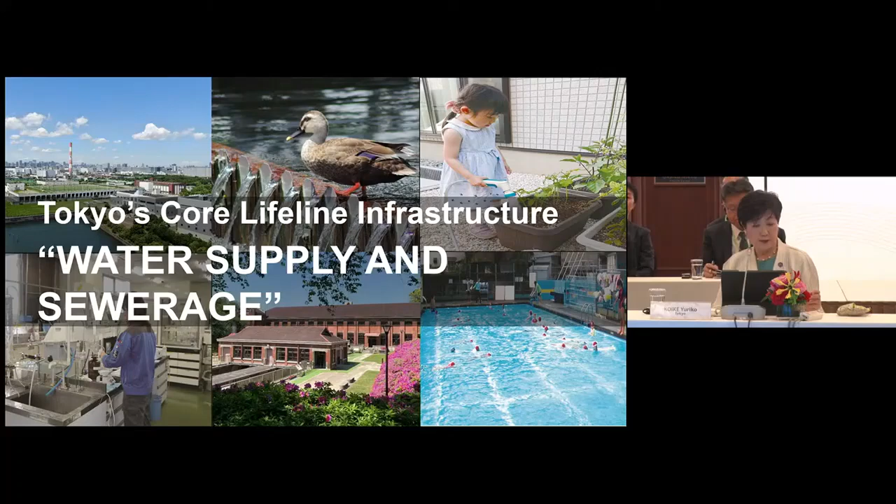Thank you very much. As you know, the theme of today's Tokyo-SEADS meeting is storm and flood countermeasures and development of urban infrastructure. I have already introduced some of Tokyo's storm and flood countermeasures during a G-NETS session, so today I will speak on measures related to urban infrastructure, with a particular focus on the core lifeline services of water supply and sewerage.

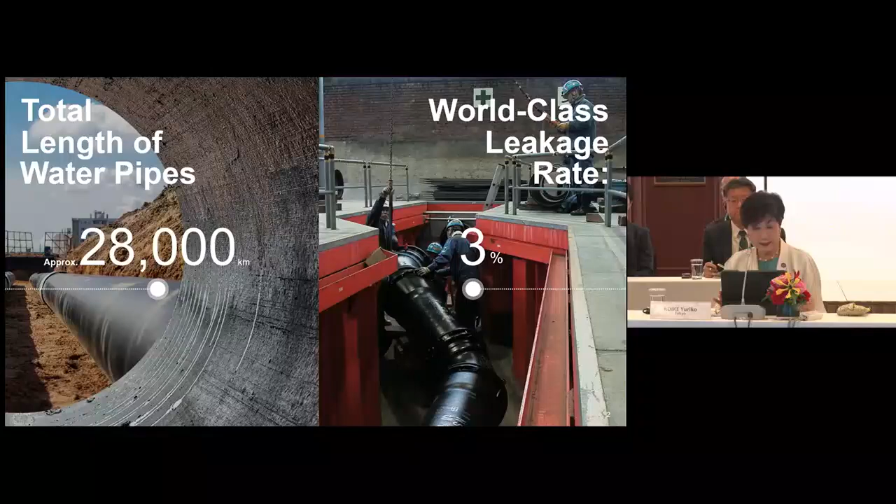Tokyo's waterworks business first began supplying water in 1898, and ever since then it has served as one of the most essential parts of Tokyo's urban infrastructure, supporting residents' lives and our city's urban activities. Our water supply system is one of the largest in the world. You can imagine, we have a 14 million population. It consists of approximately 28,000 kilometers of piping that delivers water from supply stations to households and businesses—enough to stretch two-thirds of the way around the earth.

So big. To ensure a stable supply of high quality water, measures to prevent leakage are of the utmost importance. Through comprehensive measures centering on systematically replacing water pipes and upgrading piping material, the Tokyo Metropolitan Government has achieved a leakage rate of only 3%, which is among the best in the world. Preventing water leakage not only reduces secondary damage, such as road cave-ins and flooding in buildings, but also reduces non-revenue water that goes unbilled, which contributes directly to stability in water utility operations.

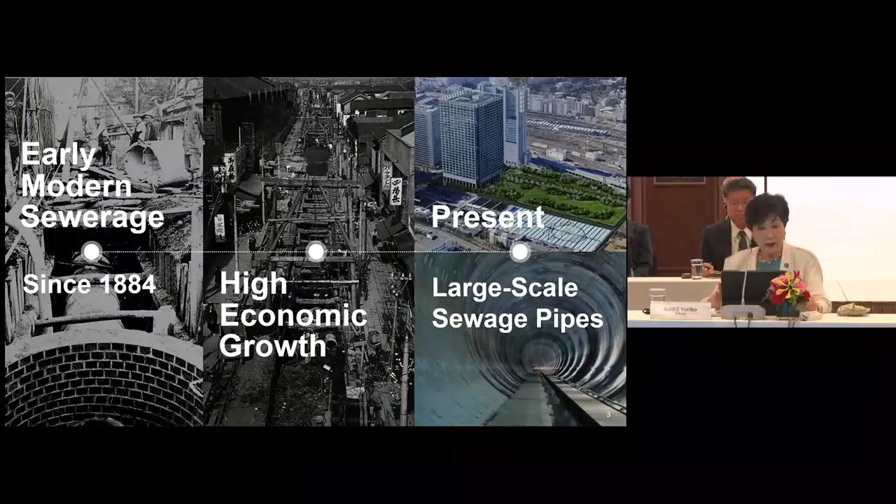We have also advanced measures to utilize spaces above sewage treatment plants as parks and office buildings. Tokyo has approximately 16,000 kilometers of sewer pipes, many of which were installed decades ago. Unless these aging pipes are systematically upgraded, the risk of road cave-ins will increase.

As such, the Tokyo Metropolitan Government has developed the so-called SPR method, a trenchless lining system for sewer pipe rehabilitation in live flow. And although this method slightly reduces the inner area of pipes, it enhances the flow of water by creating a smooth surface.

This method also allows for reduced construction times and lower costs, while minimizing impact on road traffic. In areas where this method has been used, the number of road cave-ins has decreased by approximately 90%.

There is also high global demand for the SPR method, and it has already been introduced in 200 kilometers of sewer pipes overseas, mainly in Asia, North America, and Europe.

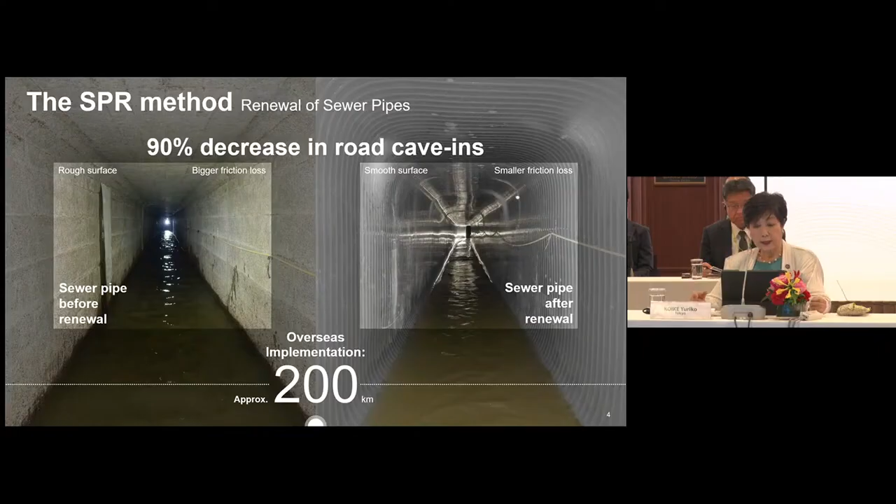Furthermore, at the request of overseas cities, the Tokyo Metropolitan Government conducts various training sessions and tours of facilities related to water supply and sewerage.

Last year, we welcomed more than 300 participants. Water supply training topics include leakage prevention measures and water quality management, and sewerage training includes a simulation of the difficulties and dangers of walking in flowing water at a facility that replicates the conditions inside an operational sewer pipe.

Water supply and sewerage systems form the essential foundation of our residents' daily lives. I think this is a really common agenda, and these are very essential infrastructure, also indispensable for enhancing resilience against natural disasters and boosting urban competitiveness.

So let's work together to build a resilient future by sharing knowledge and promoting practical and technical cooperation through the TOKYO-SEADS network. Thank you very much.

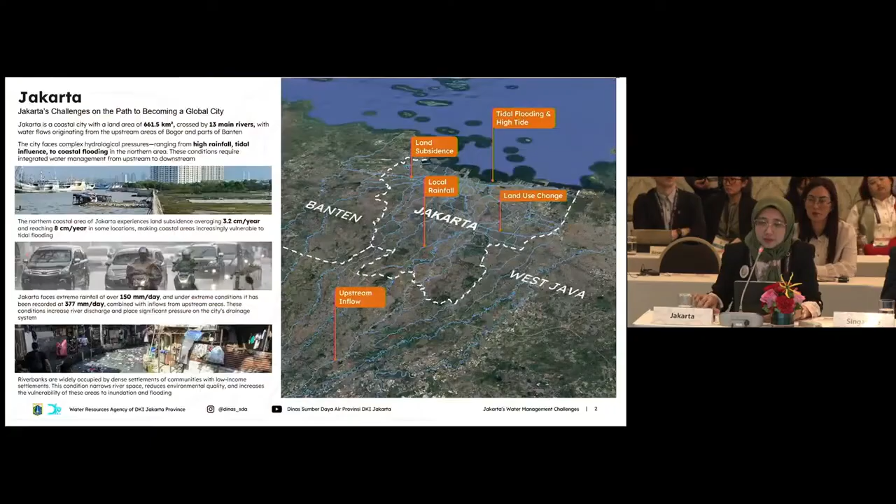Distinguished guests, ladies and gentlemen, if we are talking about Jakarta, Jakarta itself is a coastal metropolis with a land area of approximately 661.5 square kilometers, crossed by 13 major rivers. The city water system is shaped not only by local rainfall but also by upstream flow, because Jakarta is in the downstream area, surrounded by other cities, so the water flows to the city through 13 rivers.

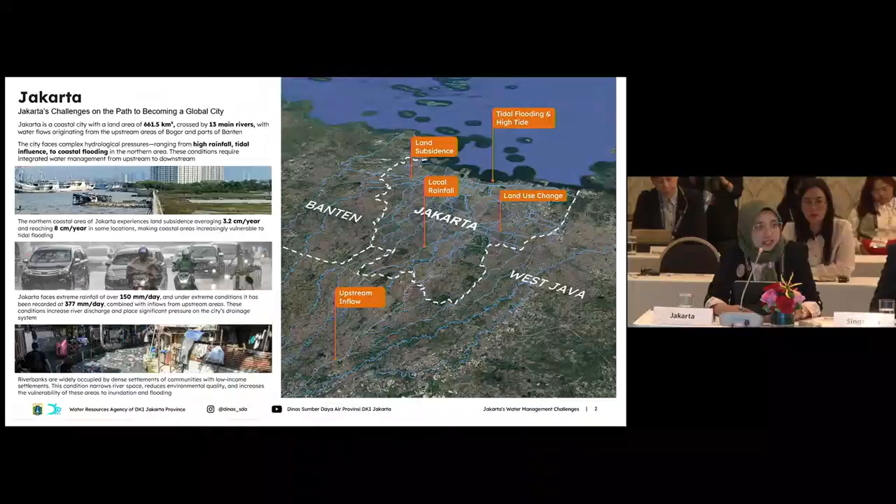As one of the world's major urban centers, Jakarta is confronted by multiple hydrological pressures at the same time. Daily rainfall can exceed 150 millimeters, and the highest recorded rainfall reached 377 millimeters in 2020. Last year, our rainfall was about 200 to 250 millimeters in just 4 hours. At the same time, Jakarta faces tidal influence and coastal flooding. Land subsidence is around 3 to 8 centimeters per year.

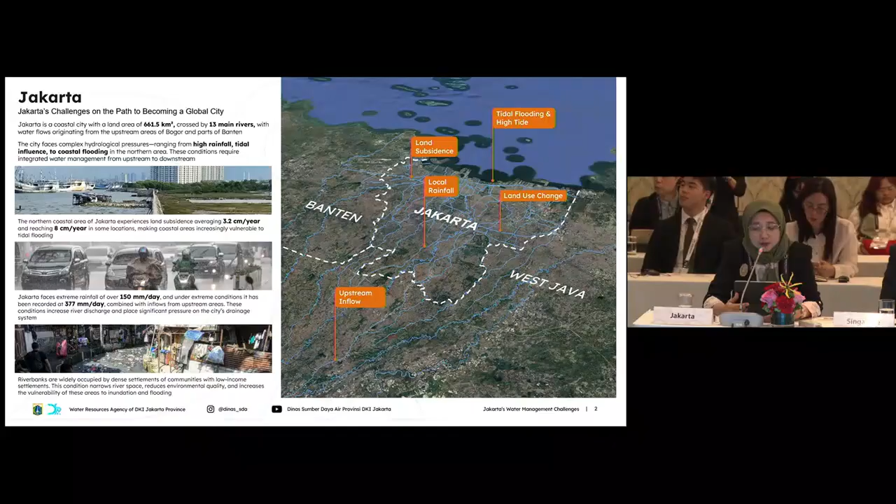We are not only facing floods but also tidal and sea-level issues that need improvement. Water challenges are not only about infrastructure, but also about environmental quality, spatial improvement, and public welfare.

In response, the provincial government of DKI Jakarta continues to strengthen an integrated approach to water management. In low-lying areas, we built polder systems. We have around 600 pumping stations in 200 locations, with a total capacity of around 700 cubic meters per second.

We have developed temporary retention pumping stations into the river and the sea. We also built improvements along rivers and canals. Improvement works are being carried out to increase conveyance capacity and reduce flood water. Right now, Jakarta is trying to improve infrastructure through nature-based solutions, combining gray infrastructure with green infrastructure, to manage runoff during heavy rainfall.

At the same time, Jakarta has learned that urban water challenges cannot be addressed through gray infrastructure alone. For this reason, the city has begun to introduce nature-based solutions, and we are also building a dike in North Jakarta through the National Capital Integrated Coastal Development. These efforts are further supported by digitalization, enabling better monitoring, more responsive infrastructure management, and more informed decision-making.

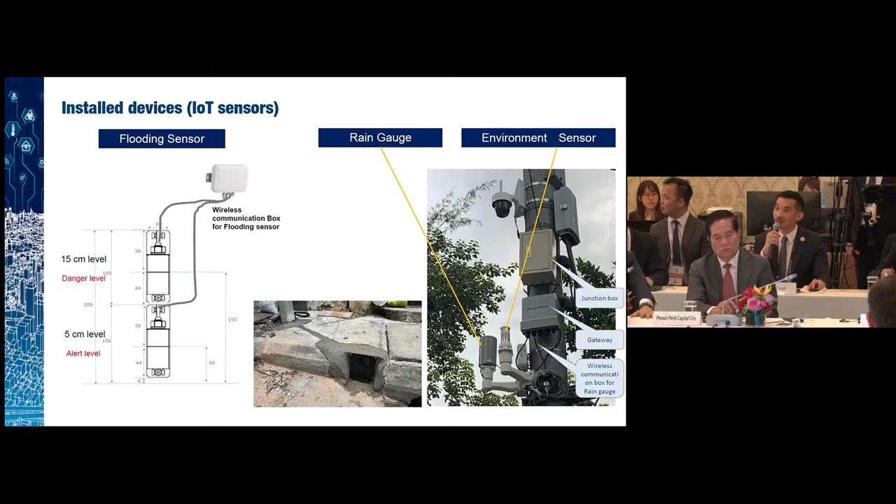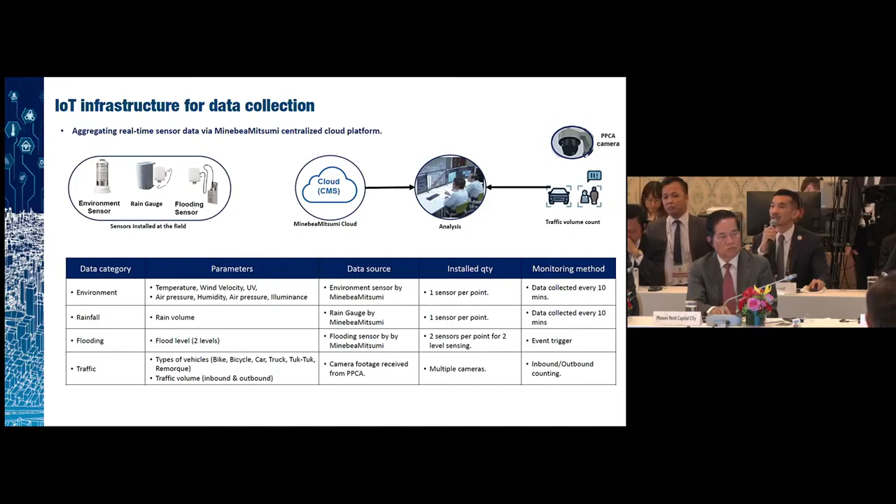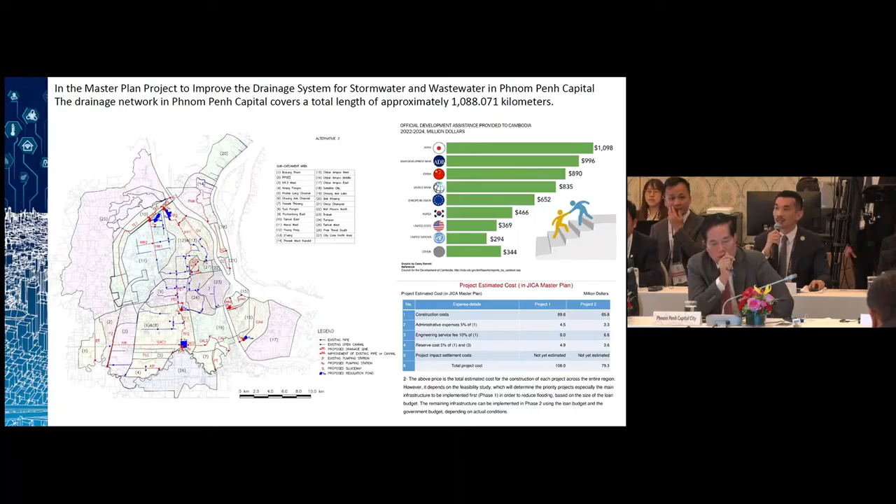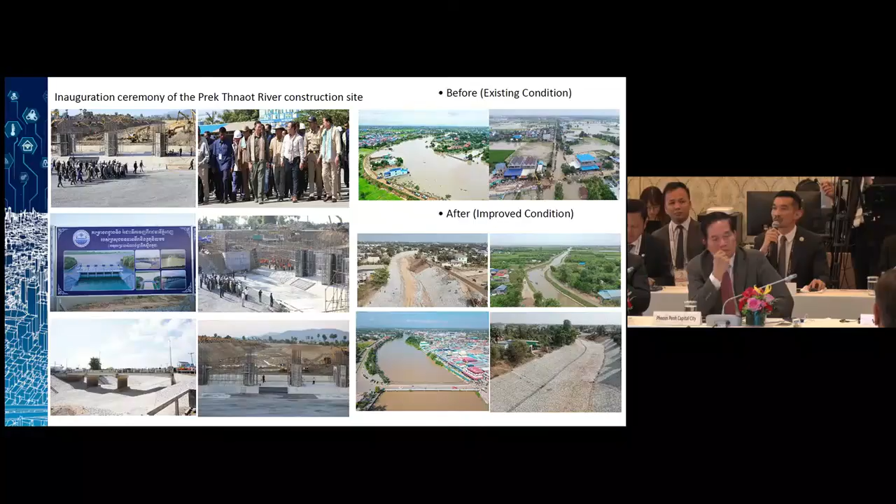As I mentioned, this water is also a blessing, but we have to take care of it. We have to prepare for any situation that could cause damage to our city. This is the area where the project is ongoing right now, and we continue to build our city to resist and be resilient for the future.

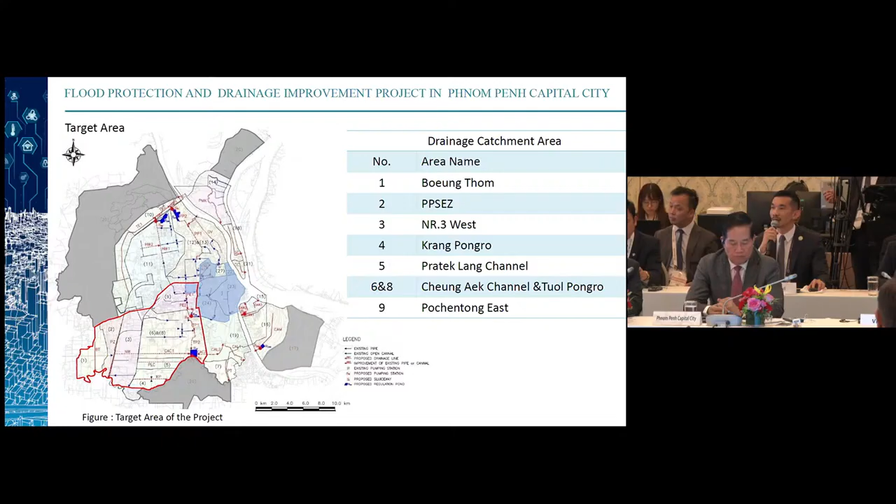In conclusion, we are working to strengthen and make our city resilient, and to improve our quality of life and sustainability. This is the key word of our development, and we want to keep Phnom Penh as the capital city of Cambodia, making it a better environment for people. Thank you very much.

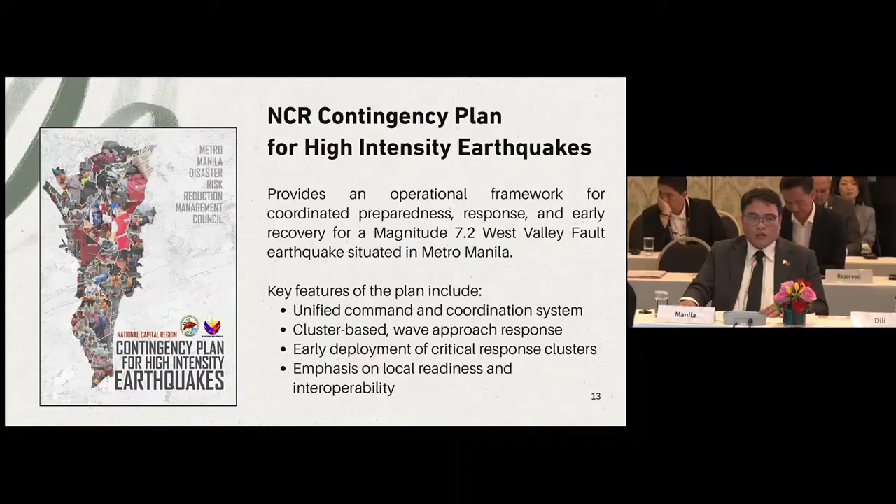We are also currently constructing a disaster-resilient data center which will remain operational during disasters so there will be no disruption, with backup for critical systems. We also partnered with a telecommunication company

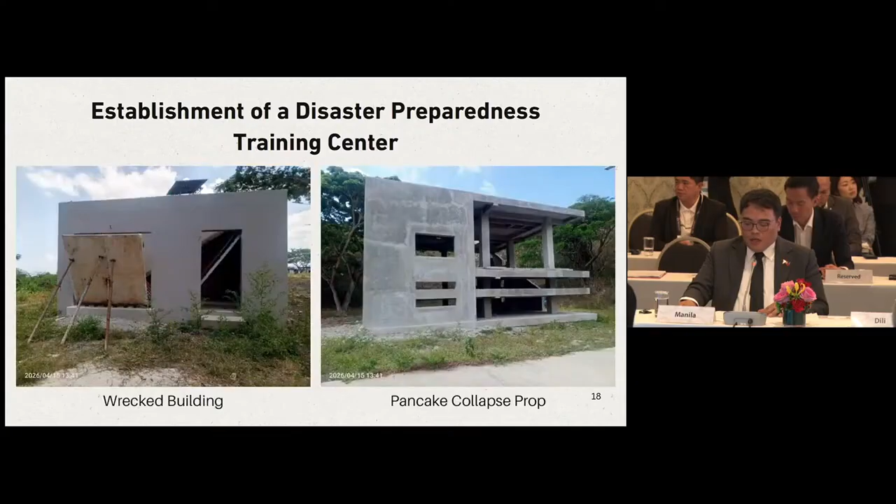for the rapid restoration of communications and to enable real-time coordination during disasters. But we will not stop there, and MMDA will further strengthen preparedness and response. We just finished constructing a disaster preparedness training center, patterned after the Tokyo Metropolitan Government Training Facility. This will provide us real-world disaster simulations, training MMDA and other government or private organizations. The training facility features rappelling, confined space rescue, collapse structure simulation, and fire suppression and multi-hazard response.

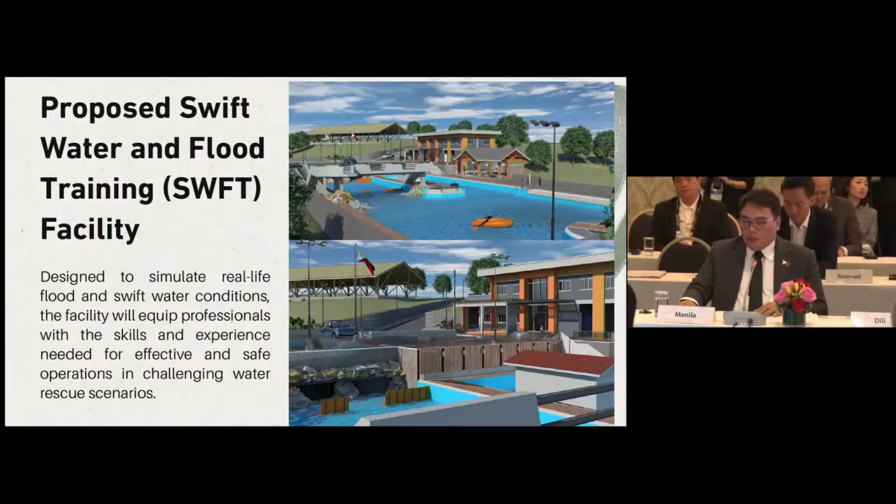We will also construct a swift water flood training facility, which will provide opportunity for training in boat maneuvering, urban flood simulation, high-angle rescue, and other water rescue activities.

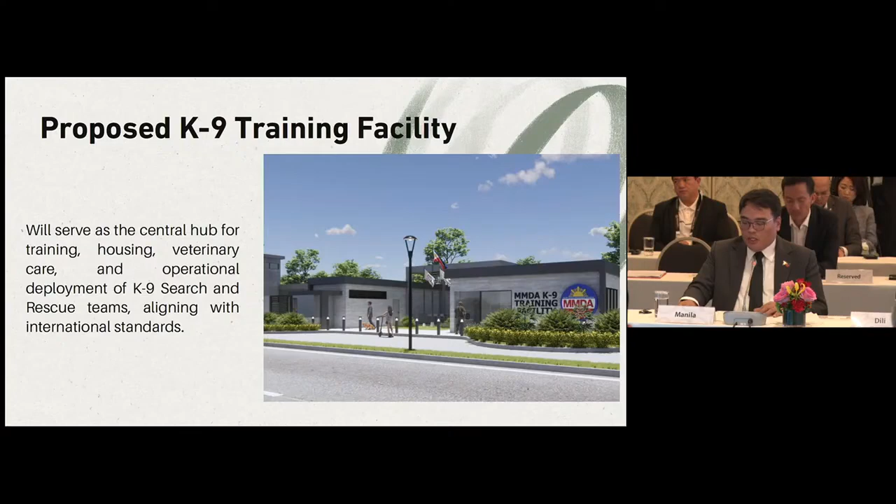We will also construct a canine training facility which will train, house, and provide veterinary care for canine units, aligned with international standards. It will have equipment for training, forest simulation environments, rubble training areas, and kennel facilities.

We'll soon launch a disaster preparedness book. This aims to enhance public preparedness through the publication of a comprehensive disaster preparedness guidebook. The guidebook will cover essential actions before, during, and after major hazards, including tropical cyclones, storm surges, floods, earthquakes, and fires, as well as preparedness measures such as go-bag essentials.

We also commit to strengthening local and international cooperation, participation in international conferences such as G-NETS, Leaders Summit, and Crisis Management Conference to share and learn best practices in disaster risk reduction, engagement in joint training, exercises, simulation, and humanitarian assistance and disaster relief activities. We would like to take this opportunity to thank Governor Koike.

We already met with the deputy of the Tokyo Metropolitan Government Fire Department, and they already provided us with insights on how to extinguish the ongoing fire in one of our sanitary landfills. And we agreed to coordinate regarding training of our personnel for disaster response. So again, thank you for this initiative, Governor Koike, and we are committed to sustain collaboration to build more resilient cities, not just in Southeast Asia, but around the world. Thank you.

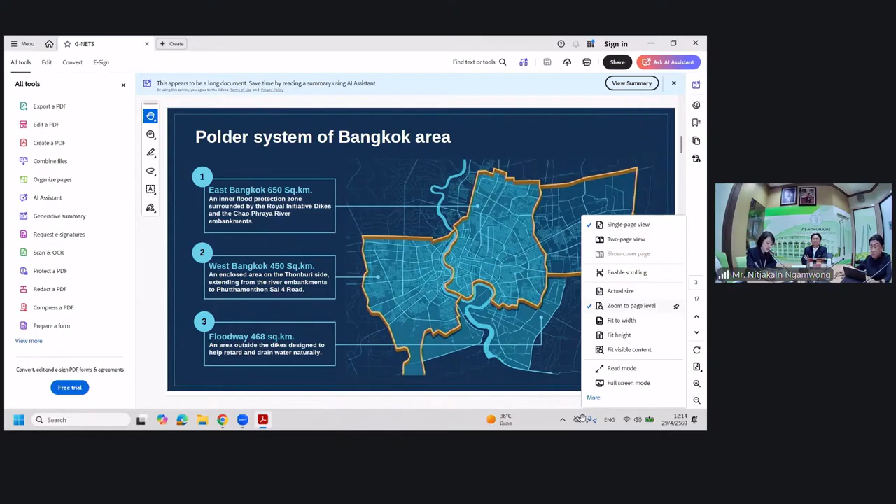I am pleased to share our city's experience and insight regarding Bangkok Metropolitan Administration's strategy on storm and flood countermeasures and the development of urban structure. As a city below sea level, flood management is one of our top priorities of urban resilience, and I look forward to our exchange of ideas today.

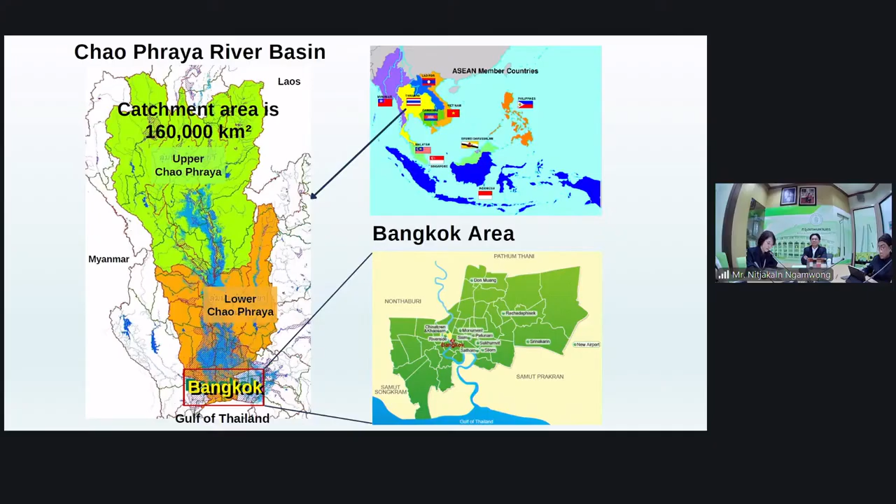Bangkok is situated at the southern end of the Chao Phraya River Basin, which covers over 160,000 square kilometers. We are the final drainage point before water from the entire northern and central part of Thailand leads to the Gulf of Thailand. Our defense is divided into three key zones.

First, East Bangkok and the Inner Protection Zone. Second, West Bangkok, covering the Thonburi side. And third, the floodway, which serves as a natural retention area outside our main dike.

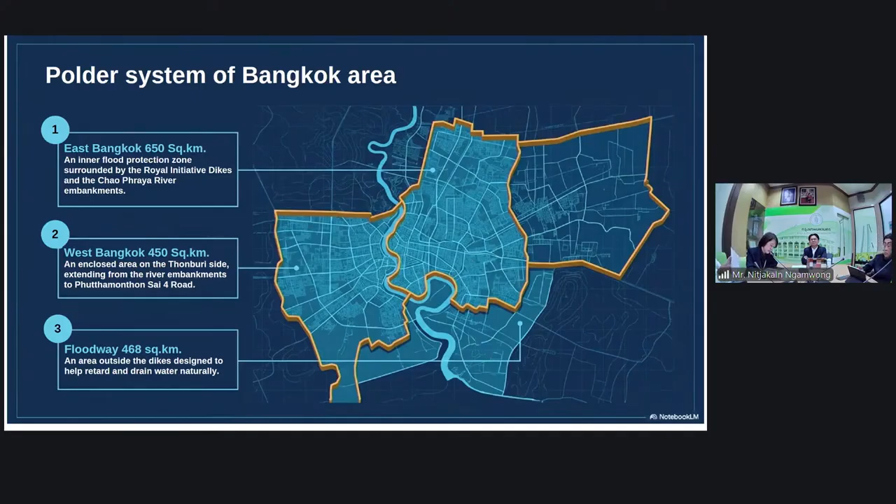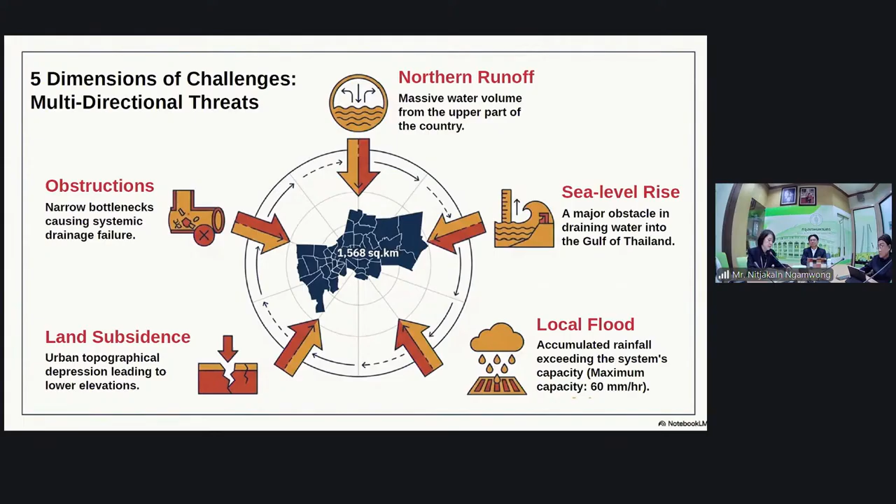We face a multi-directional threat. This includes massive northern runoff, sea level rise, and local floods caused by heavy rain exceeding our current capacity of 60 mm per hour. To combat this, we uphold a system involving dikes and water gates to block outside water, combined with pumping stations and giant tunnels to aggressively discharge rainwater from within the city to the sea.

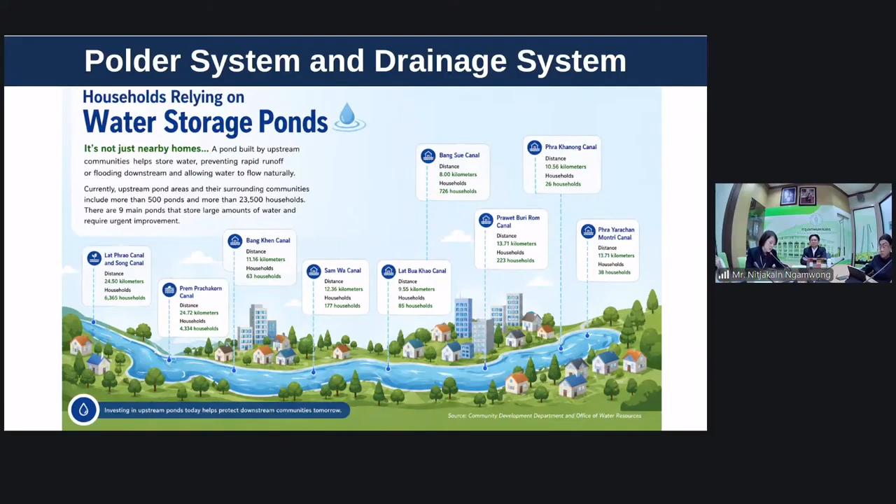Flood defense is also a social effort. We rely on over 500 retention ponds, involving 23,500 households. By investing in upstream storage, we reduce the pressure on downstream communities. We are transforming our canals, such as Lat Phrao and Prem Prachakorn Canal. This project integrates wastewater collection and improves quality of life by providing better housing for canal-side communities.

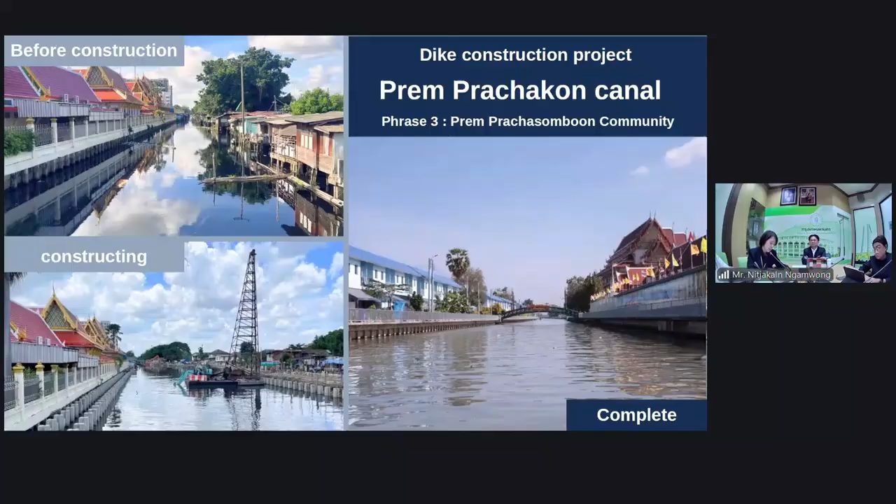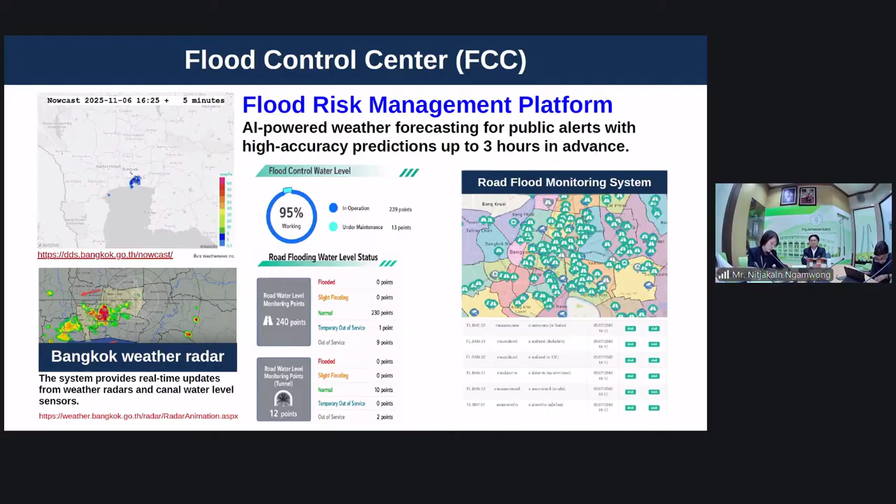Technology is our digital brain. Our flood control center uses an AI-powered nowcast system, providing weather prediction up to 3 hours in advance, alongside 240 monitoring points. A critical part of our urban strategy is the expansion of drainage pipe size.

Many of our old pipes are too small. We are replacing them with much larger diameter pipes to increase flow capacity, ensuring rainwater can be quickly moved from the street into our main system.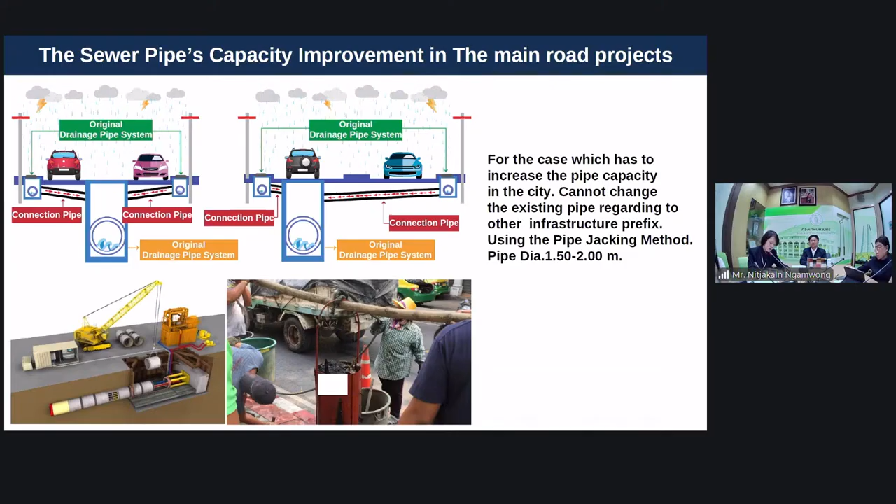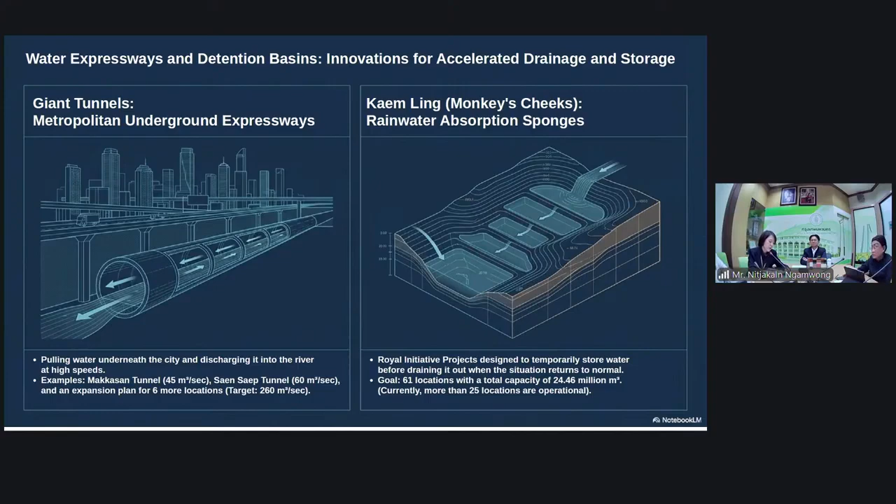Our water expressway consists of giant tunnels that pull water underneath the city. This is complemented by Kaem Ling, or monkey cheeks, Royal Initiative Projects that act as sponges to store water temporarily. Maintenance is critical. Our team works daily on canal dredging and cleaning over 6,500 kilometers of sewers to ensure our pumps can operate at 100% capacity.

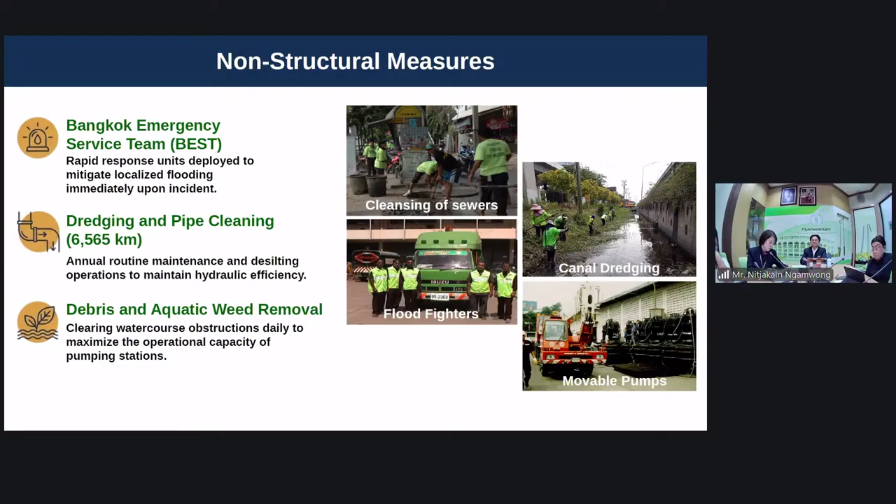Our 20-year vision is a safe metropolis. Key takeaways include integrating gray and green infrastructure and leading with digital foresight. In conclusion, solving Bangkok's flooding is about reclaiming space for water and restoring quality of life. Thank you for your attention.

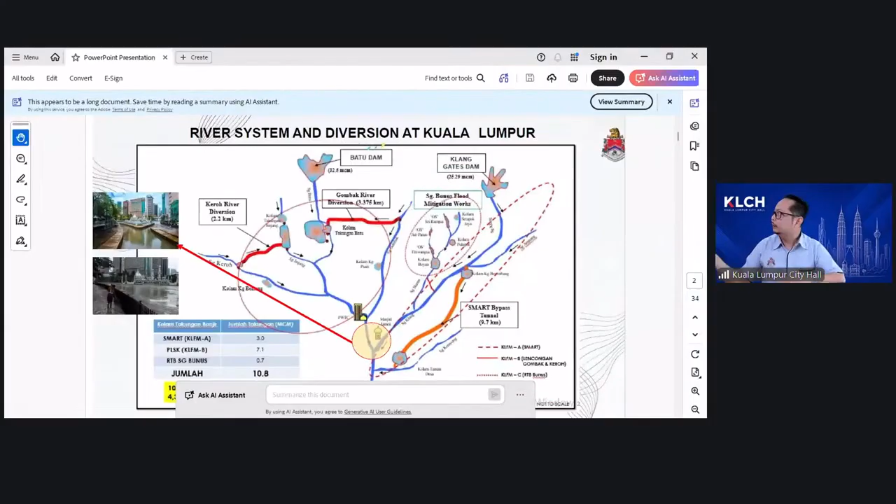To help with that, we have several strategic partners in facing flood issues, which consist of Royal Malaysia Police, Civil Defence and Fire Rescue, and others.

Several initiatives have been taken to handle flash floods in Kuala Lumpur, such as implementing an early warning system alarm, monitoring flash flood incidents through CCTV, and holding meetings with residents to identify incident locations. We have also purchased pump assets for Kuala Lumpur City Hall to discharge surface runoff out of the affected areas, and so on.

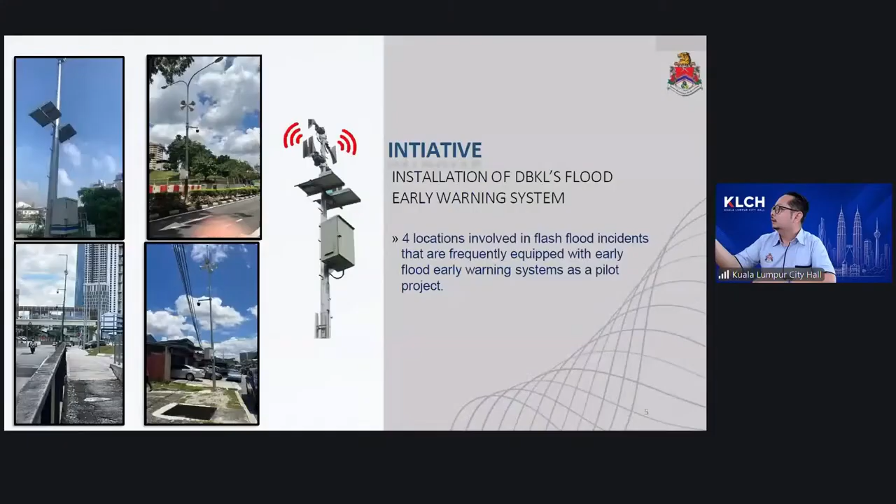We also conduct inspections on the drains, and have a special initiative to modify Kuala Lumpur City Hall assets by converting small pumps into movable pumps, so we can access flash flood affected locations in the fastest way.

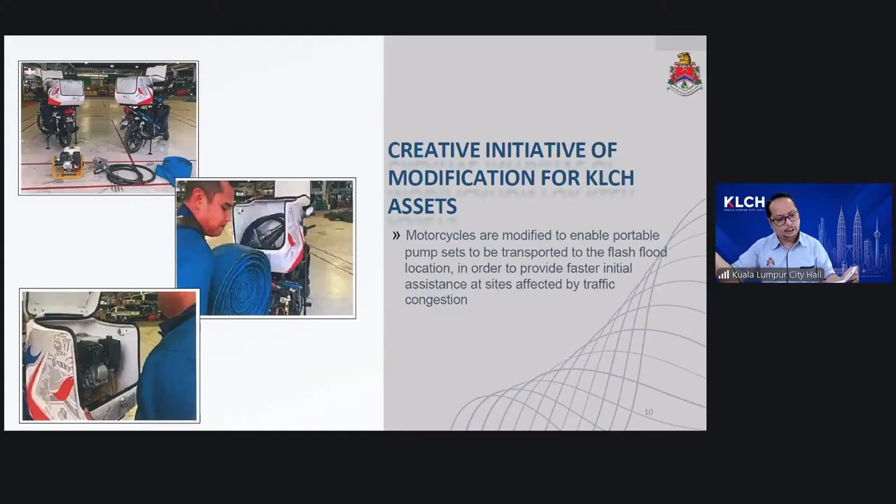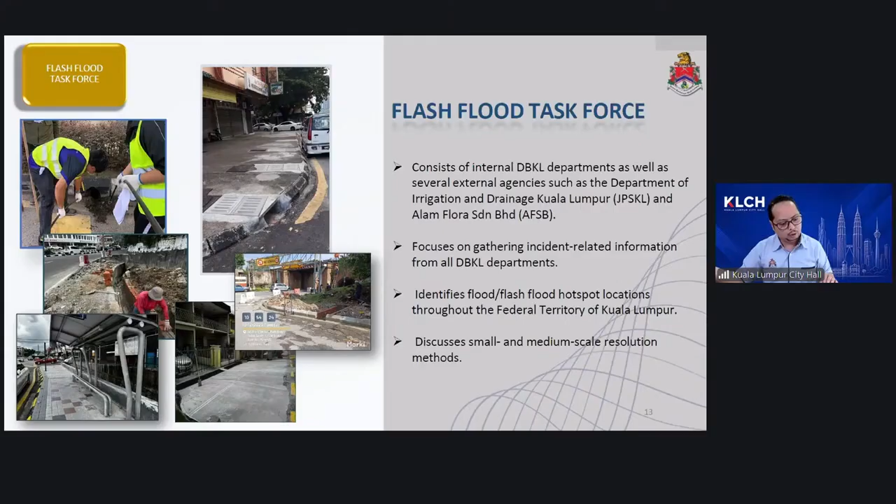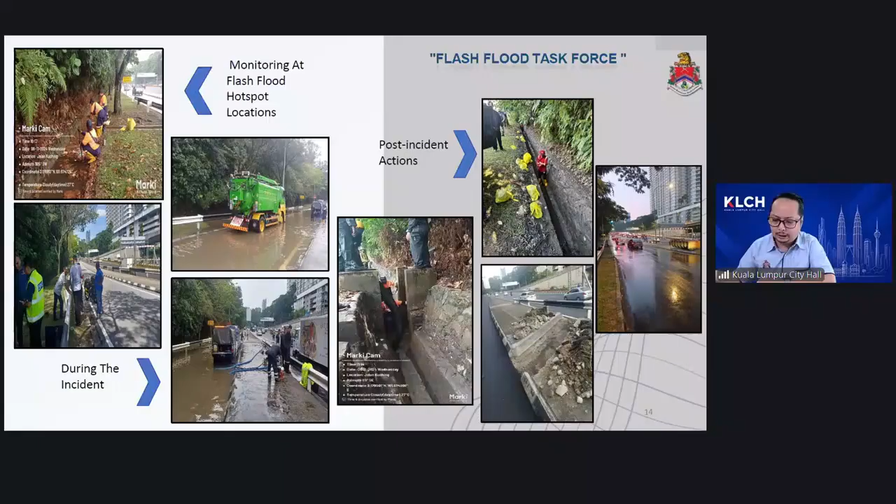Furthermore, we have a committee action body for flood management, consisting of three stages. The first is the flash flood task force, which focuses on quick-win actions and short-term solutions, acting after flash flood incidents occur. Examples include monitoring flash floods at site during the incident and post-incident actions such as cleaning the drainage system. The second stage is the Kuala Lumpur Public Incident Management Committee.

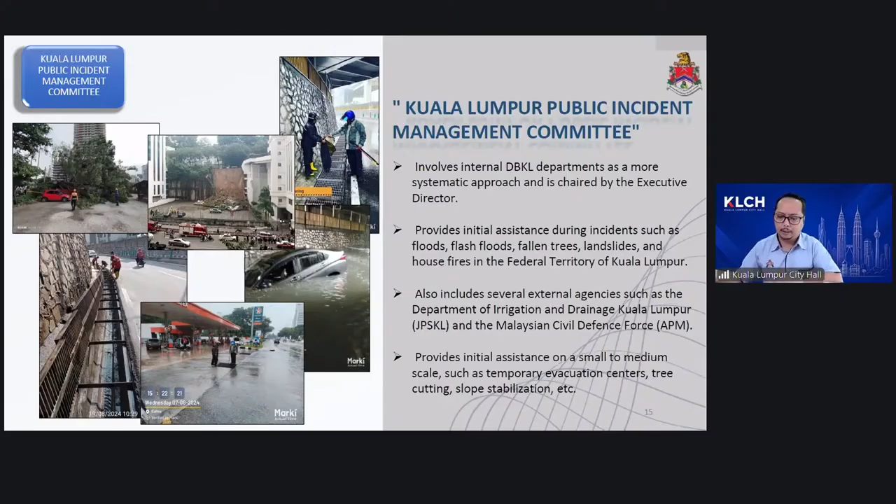At this stage, we provide initial assistance during incidents involving many parties and strategic partners as mentioned before, which may include medium-scale and temporary evacuation if needed. This is an example of that action, where we monitor the flash flood during the incident with various partners and take action afterward, for more medium-scale cases.

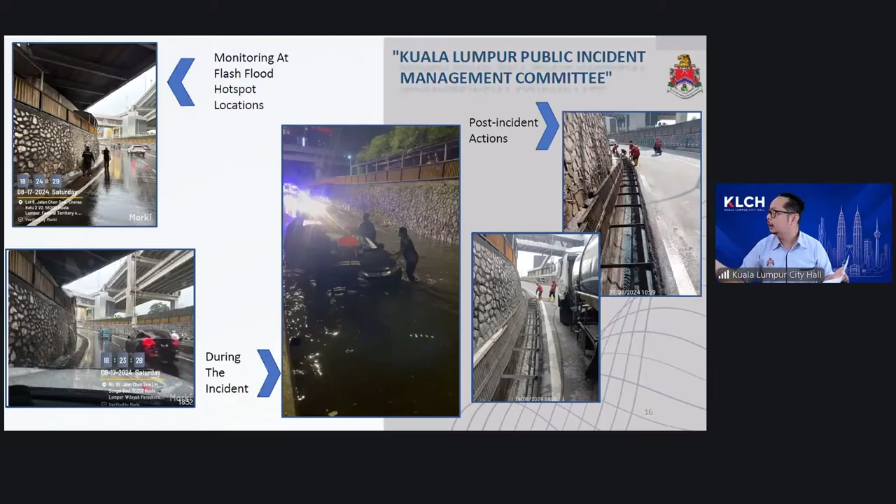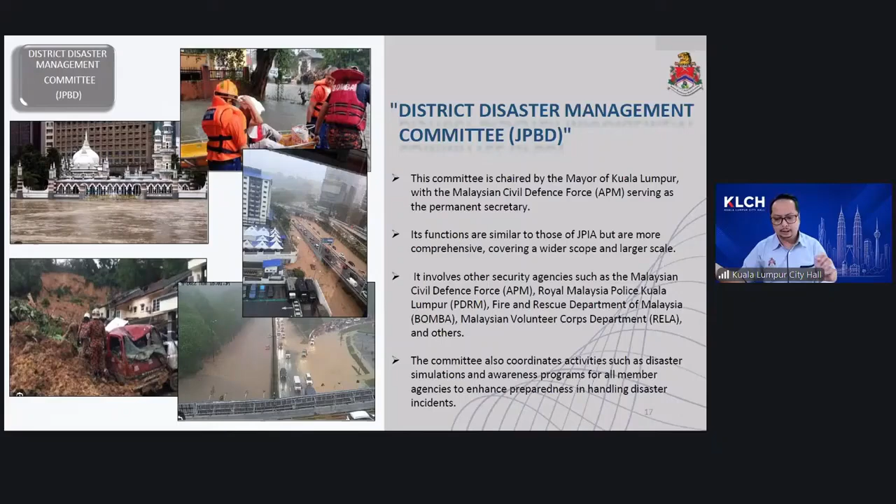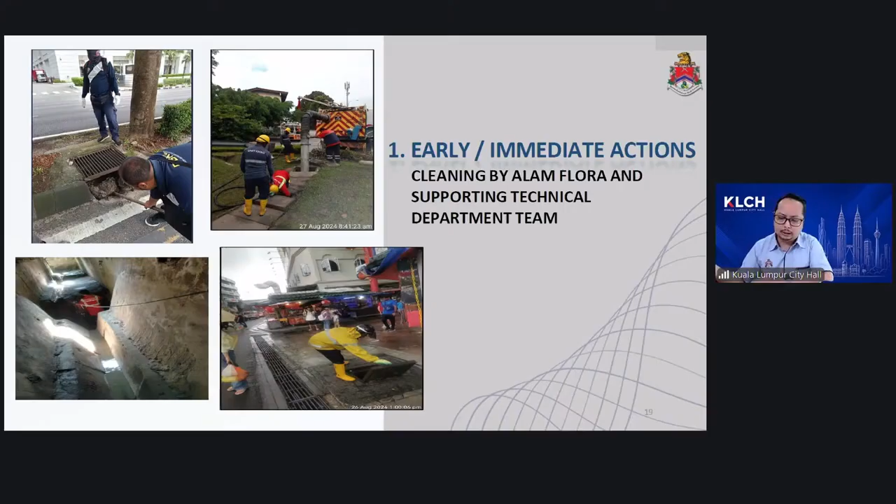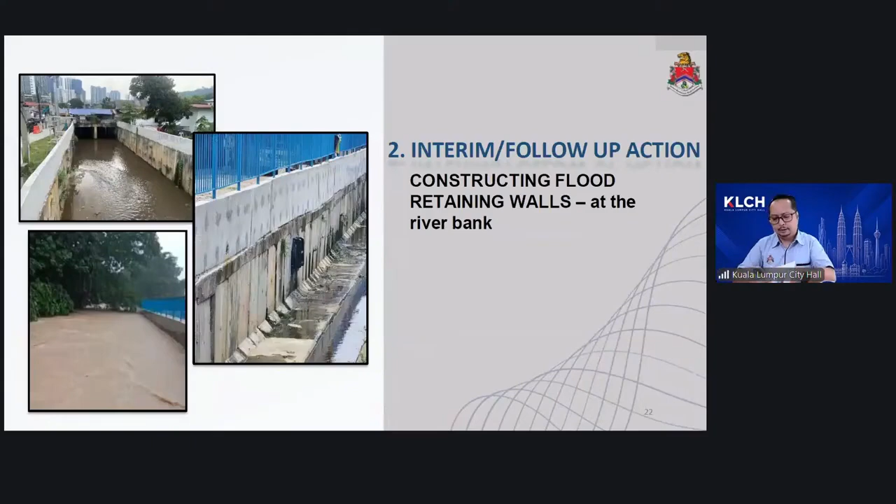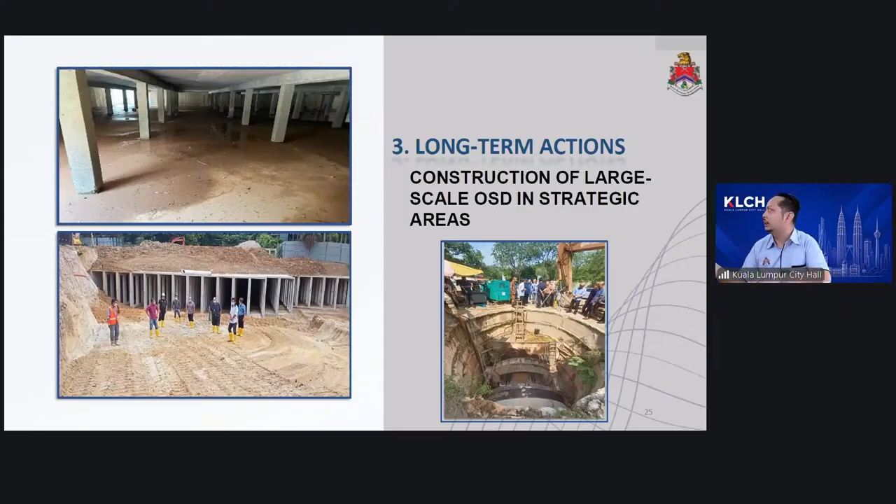The actions taken for flash flood events are divided into three categories: early and immediate action, which is cleaning the drainage system right after the incident; interim action, which includes installation of outlets, building flash flood walls, installation of floodgates, and implementation of improved erosion sediment control plans (ESCP); and long-term action, which is the construction of large-scale OSD in strategic places, along with periodic maintenance carried out throughout the years.

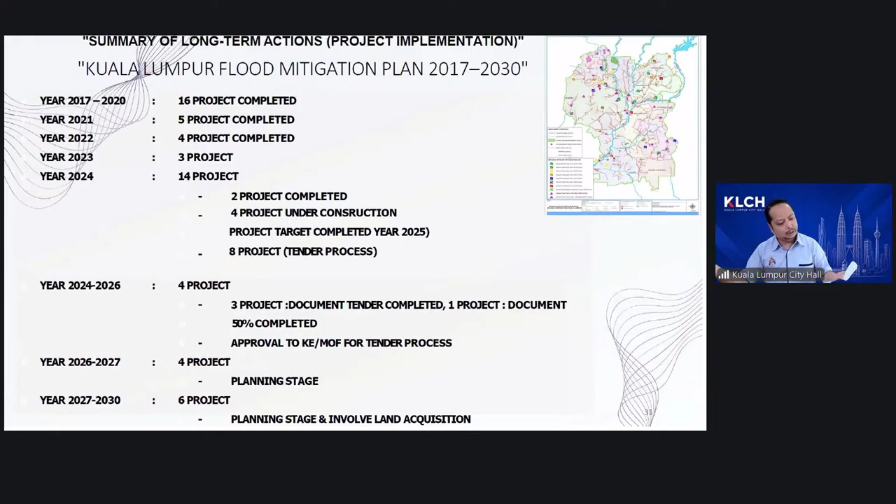This is our plan for the projects over 13 years. We have planned our projects from 2017 to the 2030s, consisting of 56 medium and large projects. This typically refers to short-term, medium, and strategic plans to reduce the risk and impact of floods in Kuala Lumpur through continuous infrastructure development. Thank you.

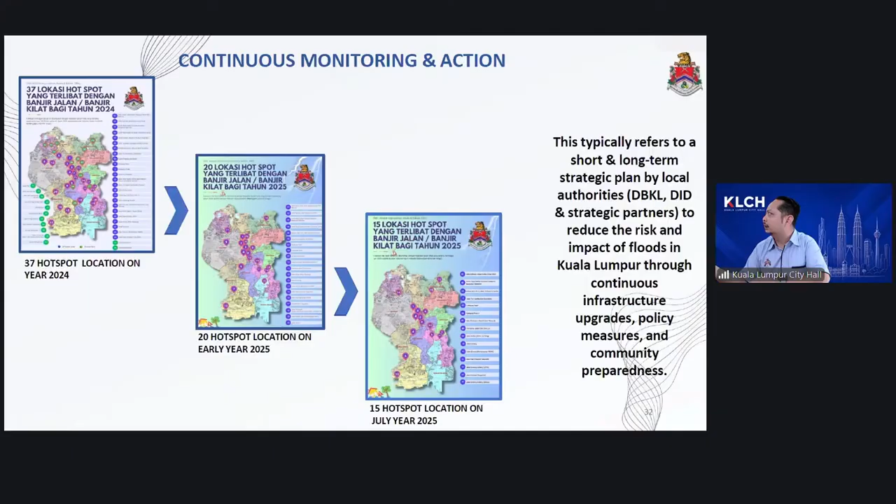Jakarta, please. I think Bangkok and Jakarta have the same problem. We have the same city condition, same city infrastructure, same rainfall, but Jakarta has quite more rainfall. I would like to know how the government, especially the Bangkok government, forces citizens to participate in owning city infrastructure.

Is the question addressed to Bangkok? Yes, it's possible because we have the same question. So the representative of Bangkok, are you ready to respond? I'm Rajapal Ling-Pasert, director of Strategy and Development Infrastructure Division.

We have participation of people in the community around the canal. We created a project called Khlong Suay, or beautiful canal, which pushes residents in the community around the canal to check, prevent the canal from waste water, and maintain the structure of the canal. Poor households along the canal participate in protecting the canal from waste and wastewater and obstructions along the canal.

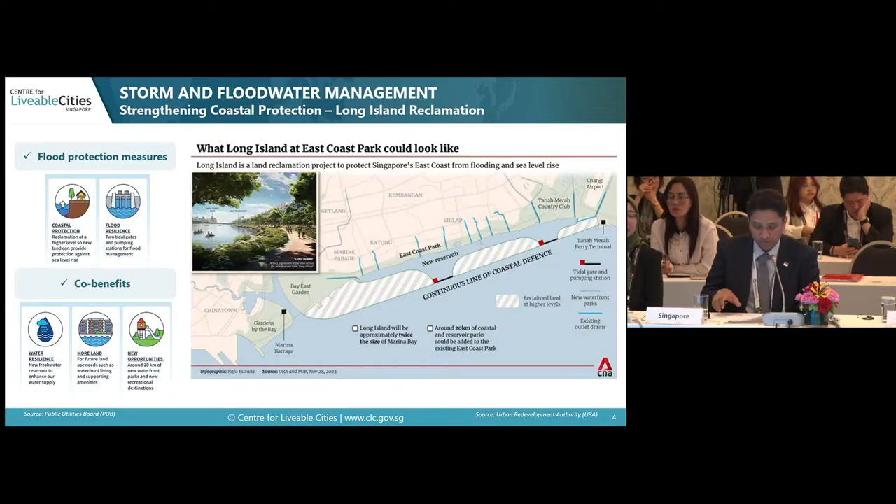I wanted to share this as a small example of how Singapore looks strategically at dealing with limited infrastructure to protect our residents and take care of them through water resource provision, as well as protection against rising sea levels. I wish to learn from many of the cities here, and I thank you for your time.

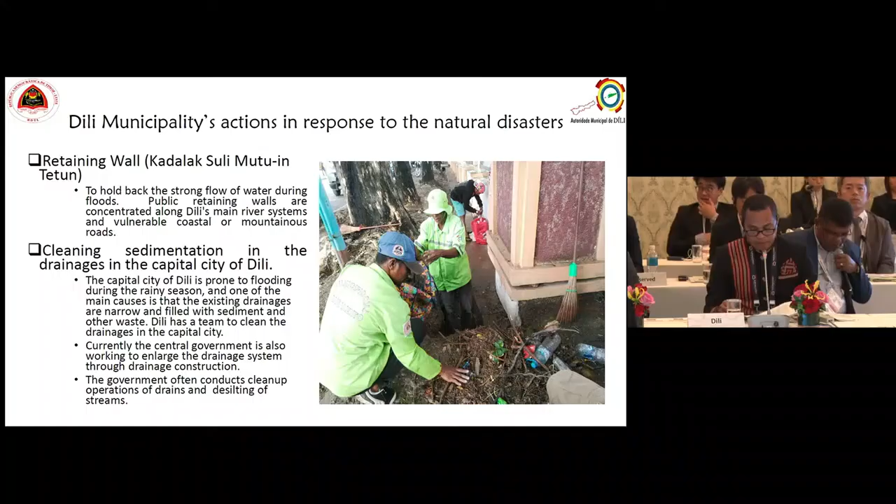Following that is waste management. Currently, Dili has 10 compactors, 6 hook lifts, and 50 manual trucks to transport waste around the capital city to the final disposal site in Tibar, around 14 kilometers from the city.

Dili also has a route system, which in this example we adopted from Japan.

We also have a scheduled public waste disposal time from 6 p.m. to 6 a.m., and scheduled garbage collection time for trucks from 6 p.m. to 7 a.m.

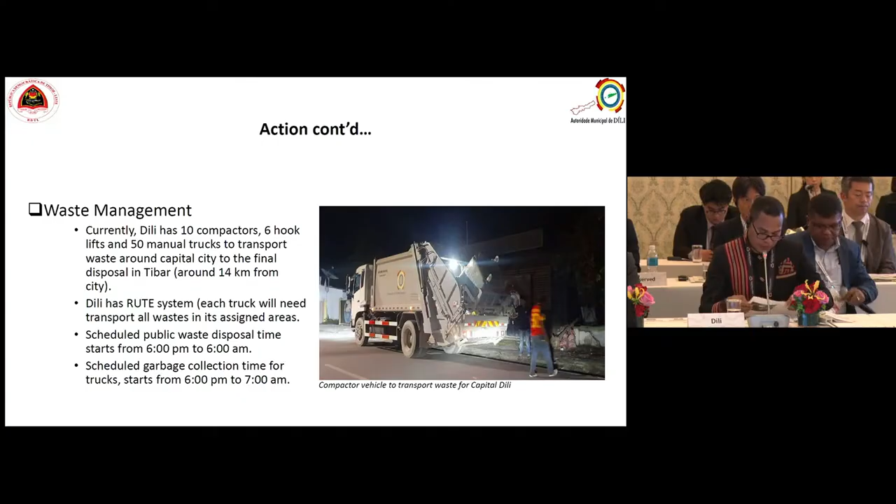In February 2026, heavy rains flooded several areas of Dili, prompting response from the Civil Protection Authority, PCO, and Natural Disaster of Dili Municipality, impacting 126 victims.

And in April 2021, floods regarded as the worst flooding in 50 years caused 46 fatalities and widespread displacement in Dili, prompting a national state of calamity.

Dili Municipal Authority intends to work with development partners to strengthen flood risk reduction and land use planning systems that are risk sensitive in the capital city, Dili.

Dili Municipality has discussed with the Japan International Cooperation Agency, JICA, on the project for the development of disaster risk reduction in the capital city of Dili, including preparation of flood control plans and guidelines for the maintenance of the rivers.

There are also major challenges. Despite this effort, challenges remain. Urban plans, particularly in capital Dili, had few earthquake-resistant factors, and there is a recognized need for increased capacity to manage disaster in accordance with international standards.

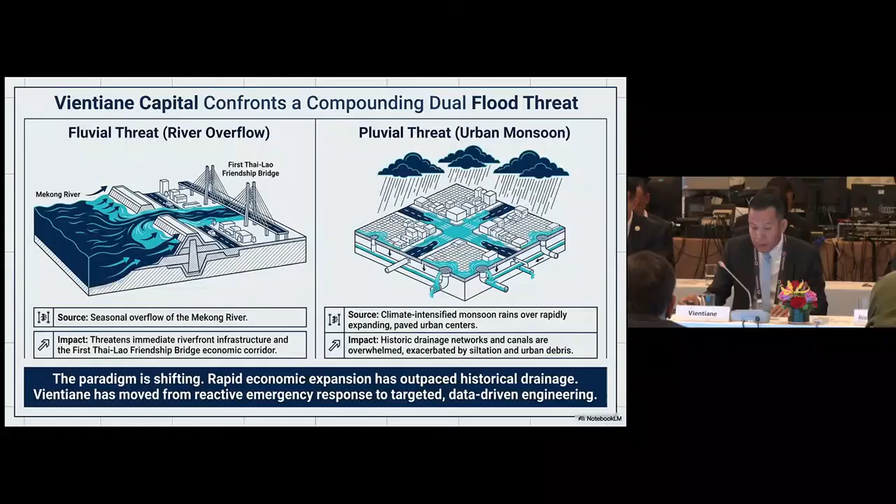The issues and challenges Vientiane capital faces are a compounding dual threat. Geographically, no other capital city in the world sits on the border like Vientiane. Our location along the Mekong River makes us highly prone to flooding and seasonal overflow of the riverbanks.

Climate change has intensified our monsoon seasons, leading to severe floods, with heavy rain pouring repeatedly in our urban center. As our city has expanded into a modern economic hub, our historical drainage infrastructure has struggled to keep pace.

Furthermore, we face immense operational challenges. Our existing channels and drainage are frequently compromised by siltation and urban debris. For my department, maintenance and clearance of our existing infrastructure is just as critical, and sometimes just as difficult, as building new systems.

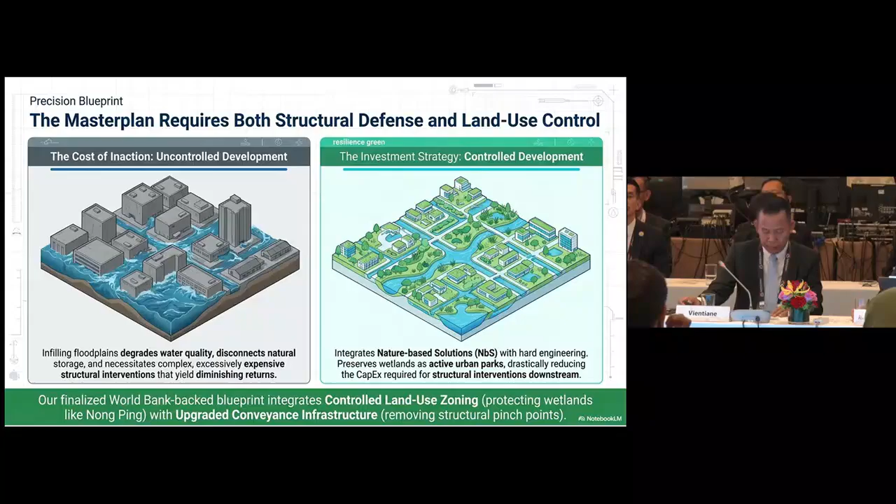We look forward to our roadmap in its entirety, focused on implementation. We have split our finalized construction blueprints into clear short, medium, and long-term phases. In the short term, we are executing aggressive channel clearance. In the mid and long term, we have blueprints ready for major pumping station rehabilitations and permanent macro defenses along the Mekong.

To measure our success, we are targeting a 50% reduction in urban flooding across the commercial corridors by year 2035. Vientiane Capital presents highly specific invitations today.

We have done the complex preparatory work. We have the data, the master plan, and a finalized project scope. Our next step requires only financial support. We actively call upon international donors, regional partners, and financial institutions such as ADB or other donors to cooperate with us and fund the implementation-ready projects.

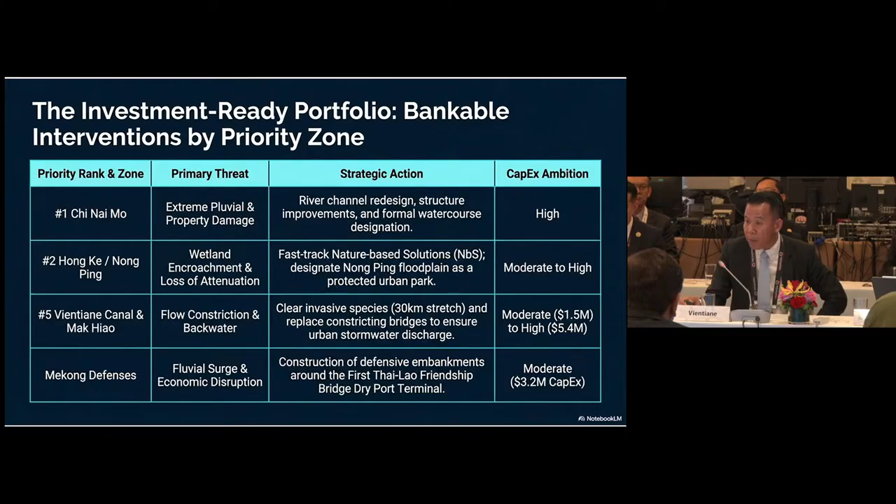Madam Chair, Your Excellencies, good afternoon. Thank you, Governor Koike, for inviting us here. It's a privilege for ADB to be part of this as an observer.

Let me start by sharing how impressed I am, and I'd like to congratulate all of you, Your Excellencies, on the decisive actions you have taken on some of the daunting challenges of our times in the cities that you're leading. What I hear across the interventions today from you is not just urban challenges. It seems to be a structural shift that we are looking at.

Cities in Southeast Asia are becoming the front line of climate risk, fiscal pressures, and economic transformation, all at the same time. I've been living in the region long enough to know what many of you have to deal with. Heat that lingers longer, floods that arrive faster, and systems being pushed to the limits. It's no longer episodic, it's becoming the new baseline, very unfortunately.

We estimate at ADB that between now and 2030, 90 million more people will move into ASEAN cities. That is the equivalent of adding a city the size of Bangkok every year. These people coming in will need water, transportation, housing, electricity, and above all, jobs. At the same time, the ASEAN region faces an infrastructure financing gap of at least $2.8 trillion through to 2030.